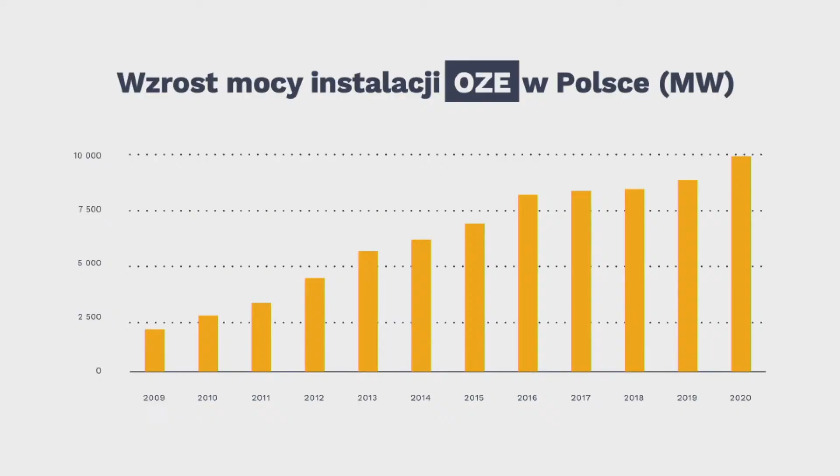LTE 450. Nowoczesna technologia, bezpieczeństwo, niezawodność, przyszłość.

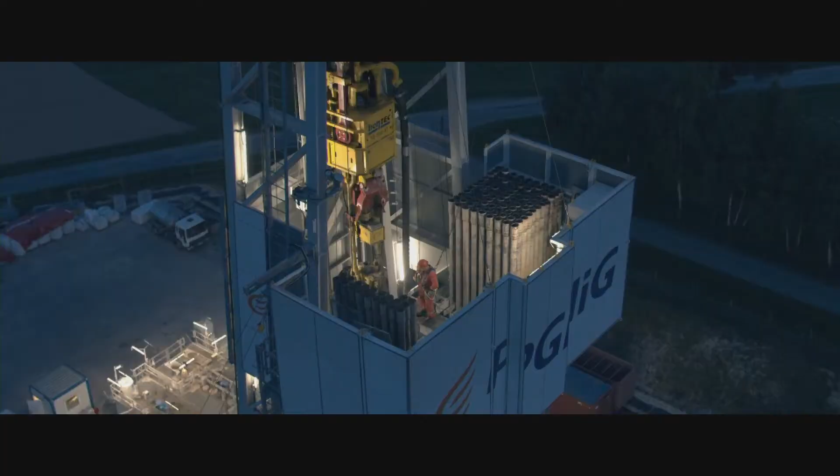Ma to kluczowe znaczenie dla ekspansji i przyszłości naszego przedsiębiorstwa. Jesteśmy wiarygodnym i pewnym dostawcą dla naszych partnerów biznesowych i klientów. Gwarantujemy stałość dostaw i najwyższą jakość produktów. Zapewnia to naszym kontrahentom poczucie bezpieczeństwa i warunki stabilnego rozwoju.

Strategia działania PGNiG opiera się przede wszystkim na poszukiwaniu i eksploatacji złóż znajdujących się na terenie kraju i za granicą. Dzięki temu Polska wzmacnia swoją niezależność energetyczną. Chcąc dywersyfikować źródła pozyskiwania surowców, importujemy gaz z rynków zagranicznych. Istotna część przyszłych dostaw będzie pochodzić z Ameryki Północnej.

Poszukujemy i eksploatujemy złoża ropy naftowej i gazu ziemnego na norweskim szelfie kontynentalnym, a także w Pakistanie i innych częściach świata. Całość tych działań sprawia, że jesteśmy kluczowym gwarantem bezpieczeństwa energetycznego Polski.

Gaz ziemny jest najlepszym rozwiązaniem dla każdego przedsiębiorstwa. Korzystając z zasobów naszej ziemi, troszczymy się jednocześnie o przyszłe pokolenia. Naszym celem jest ciągły rozwój i dostarczanie takich rozwiązań energetycznych. Dzięki temu jesteśmy dzisiaj obecni w każdym polskim domu.

PGNiG. Odkrywamy przyjazną energię.

Energia elektryczna towarzyszy nam w każdej chwili życia. Za stały i bezpieczny przesył energii elektrycznej w całej Polsce oraz bilansowanie krajowego systemu elektroenergetycznego odpowiadają pracownicy polskich sieci elektroenergetycznych. Energii elektrycznej nie da się przechowywać, dlatego w każdej chwili należy produkować jej dokładnie tyle, ile zostanie zużyte. Oszacowanie zapotrzebowania na energię elektryczną i jej bilansowanie to jedno z najtrudniejszych i najważniejszych wyzwań, z którymi polskie sieci elektroenergetyczne mierzą się każdego dnia. Nasza sieć to ponad 14 600 km linii 220 i 400 kV.

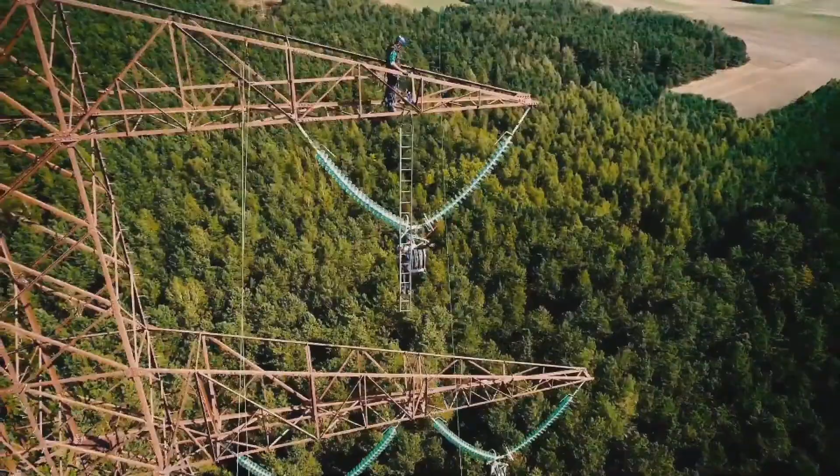Wraz z dynamicznym wzrostem zapotrzebowania na energię elektryczną musimy sprostać wyzwaniom nadchodzącym w kolejnych dziesięcioleciach. Przy wszystkich naszych inwestycjach minimalizujemy wpływ na środowisko naturalne i otoczenie. Wspieramy społeczności lokalne i naszych sąsiadów.

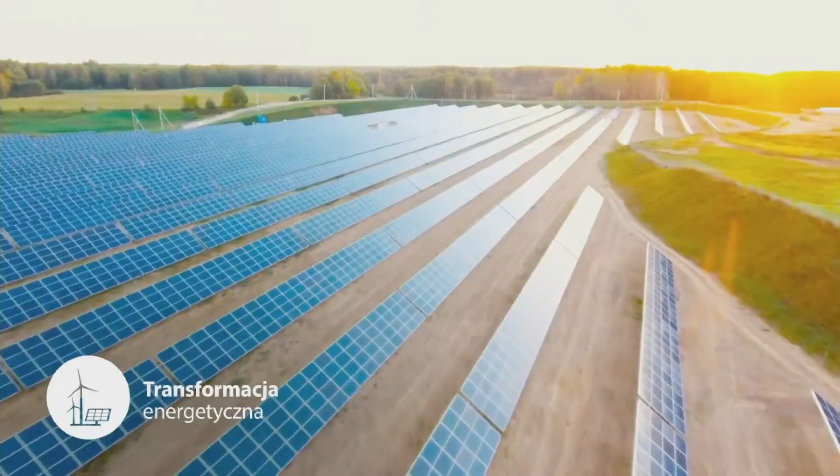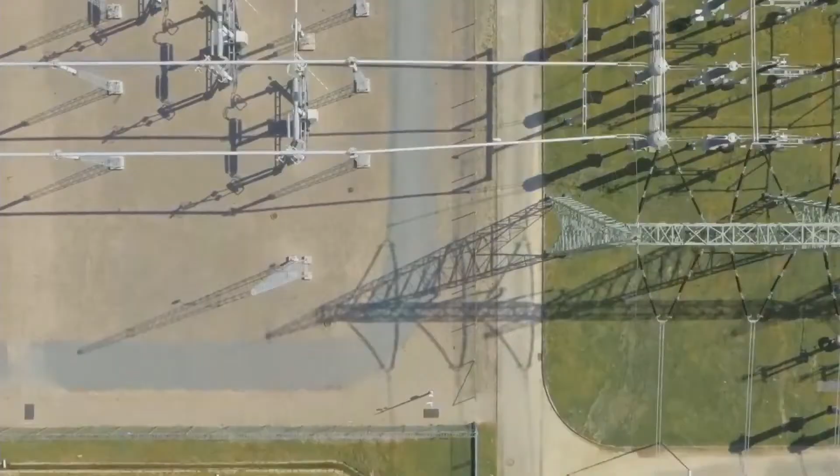No okej, dzięki, no spoko, jak się nie da, przeżyjemy godzinę.

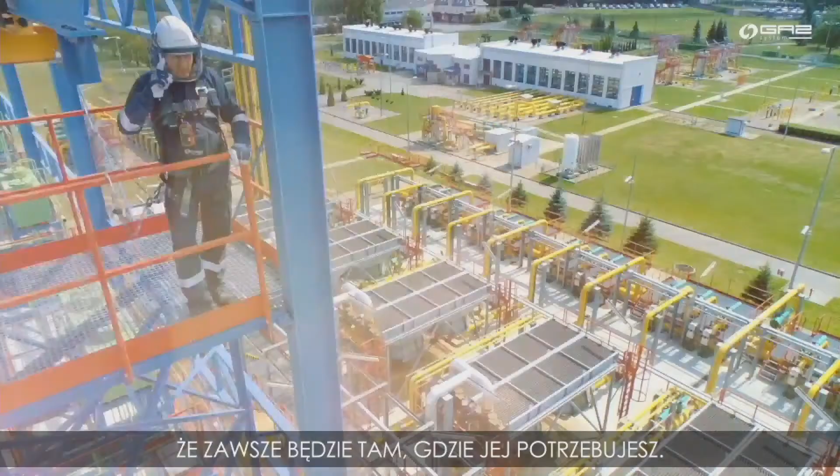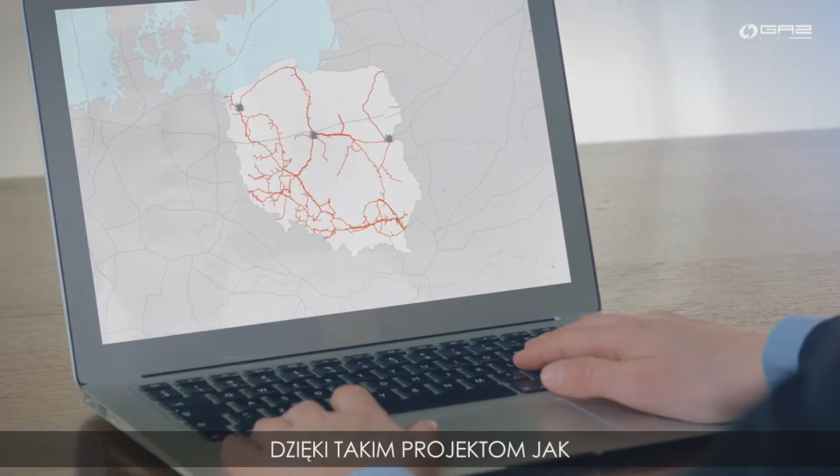Good luck. Thank you. Same to you. It's very nice. It's very good. Hello.

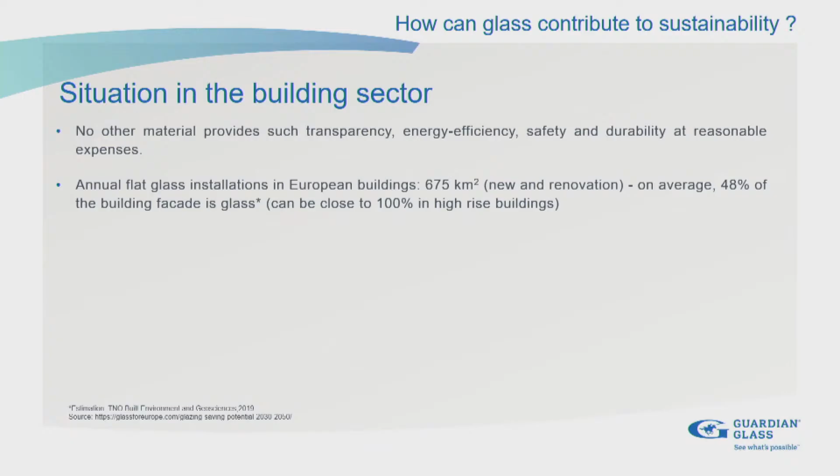If you look at annual flat glass installations in Europe, we have 675 square kilometers of enclosed area in new and renovation buildings. On average, almost 50% of the building facade is glass, but that can be even close to 100% if we talk about high-rise buildings with fully glazed facades.

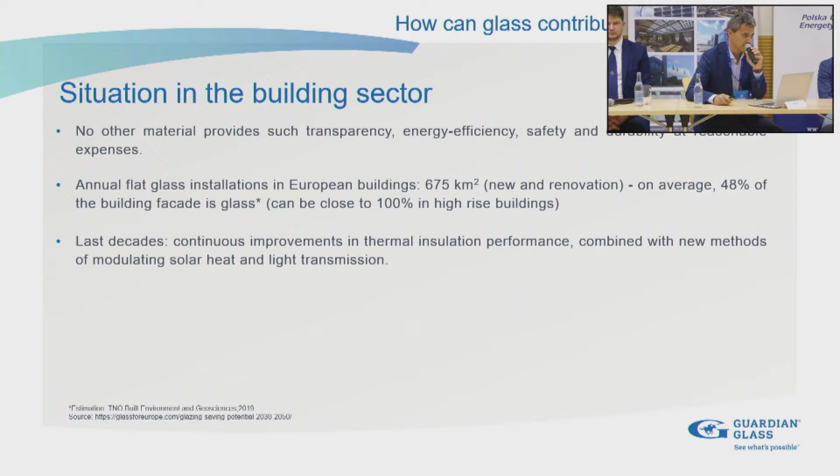In the last decades, continuous improvements took place in thermal insulation performance, combined with new methods for modulating solar heat and light transmission. I won't go too deep into that - these are the standard high performance glass products you all know, related mainly to solar control and thermal insulation.

You see that flat glass products are indispensable to key sectors of the economy - in building, automotive, and energy sectors. So in the climate neutral EU, and this is also an important message, by 2050 we will demand more glass for highly energy efficient windows, and not only windows, but also glazing and other cladding systems.

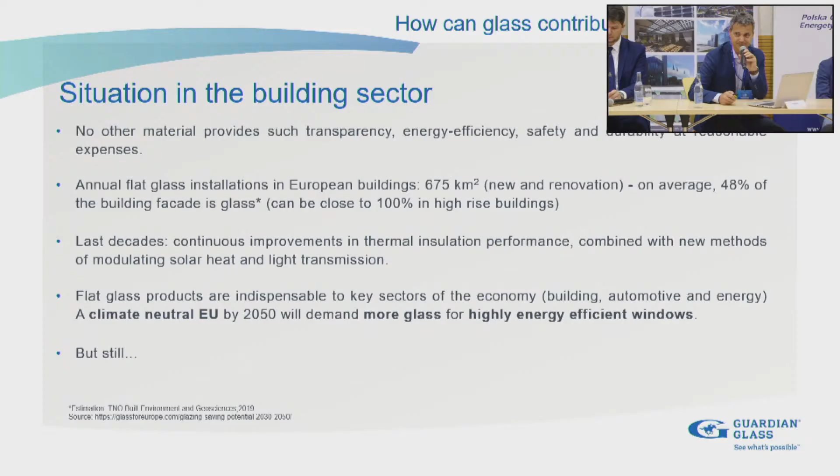But still, the building sector is the most CO2 emitting sector in the EU, with 36% of total emissions. This is a huge number, but the same sector has also a huge potential for energy savings.

For example, by energy efficient building products, ideally with a positive energy balance during lifetime. So if we talk about passive solar energy gain with a passive house or net zero energy standards, but also renewable energy generation - here we need to talk about heating systems.

Of course this needs to change from fossil fuels to electricity, heat pumps, but - and this is our main topic today - building integrated photovoltaic, because we need to use the surface we have available, or still create, to generate renewable energy in short and mid term, not long term. This is really a short and mid term issue.

But it's not only the products itself and the performance - it's also the approach to stewardship of the glass industry. What does that mean? How do we produce products? For example, in terms of material health, material reutilization, renewable energy and carbon management, water stewardship, even social fairness.

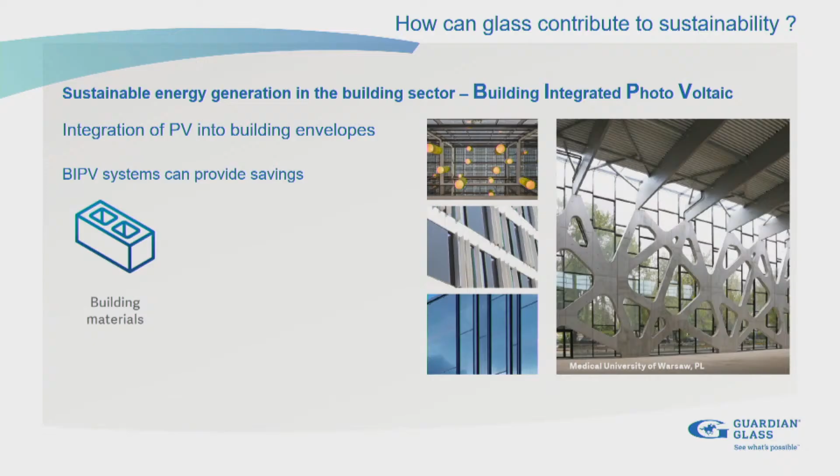And with BIPV, we can provide certain savings - savings on building materials, but also energy cost. So what is Guardian doing in terms of BIPV? We have a cooperation with ML System to offer a complete range, because we have recognized that these products, providing a sustainable way of producing renewable energy with glass in buildings, that's a key factor in the future. And that's really a big driver also for the European and finally also the global glass industry.

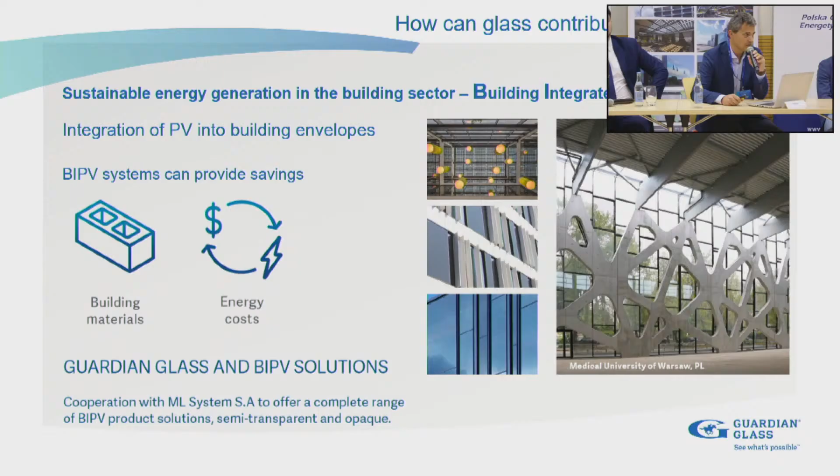So what means BIPV? Actually with BIPV we can cover all opaque parts of buildings. That can be just safety glass, printed glass, all possible shapes, finishes, for all kinds of design, but also transparent in double and triple glazing units, providing unaltered transparency and renewable energy at the same time.

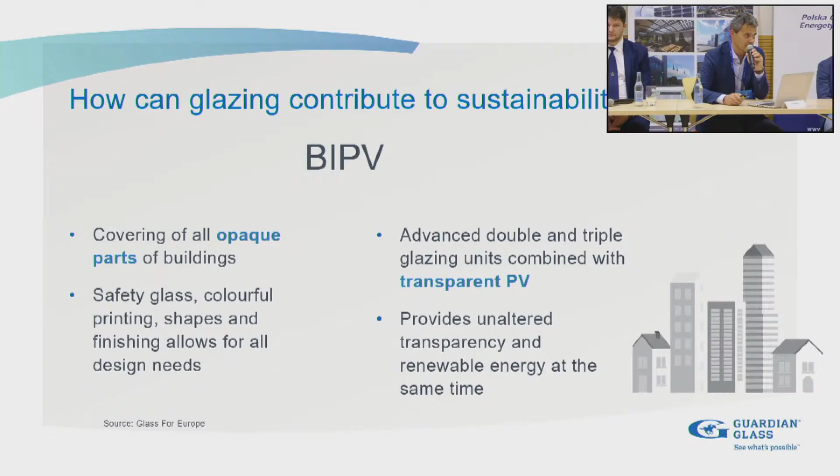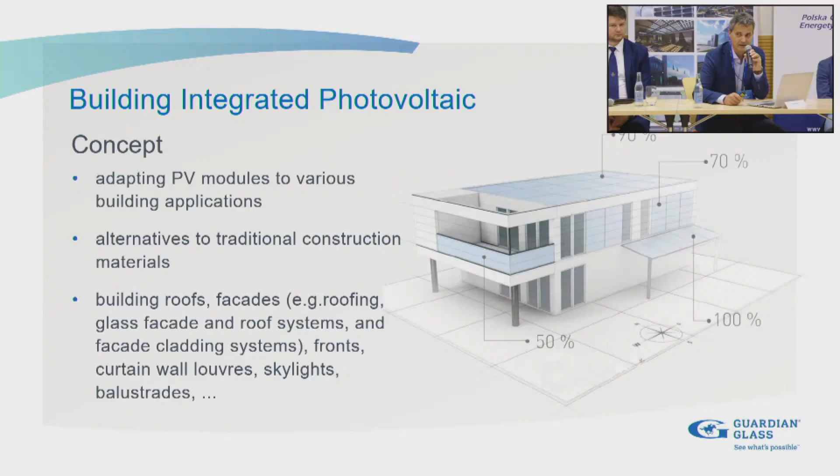So what is the concept behind BIPV? Adapting PV modules to various building applications and to replace other building materials, either glazing or other cladding materials like aluminium. In roofs or in facades, fronts, curtain wall louvres, skylights, balustrades. Wherever you install a piece of glass, theoretically you can install a piece of BIPV.

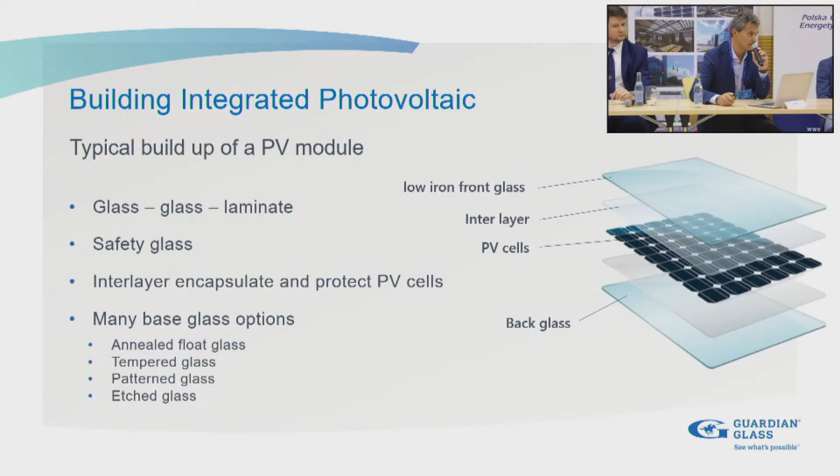If you look to a typical build-up of a PV module, you see we are very flexible. We can provide a lot of additional performances and attributes. We can use annealed float glass, tempered, patterned glass, etched glass to provide any possible design, and even safety features. So wherever a laminated glass is installed, we can think about installing building integrated photovoltaic.

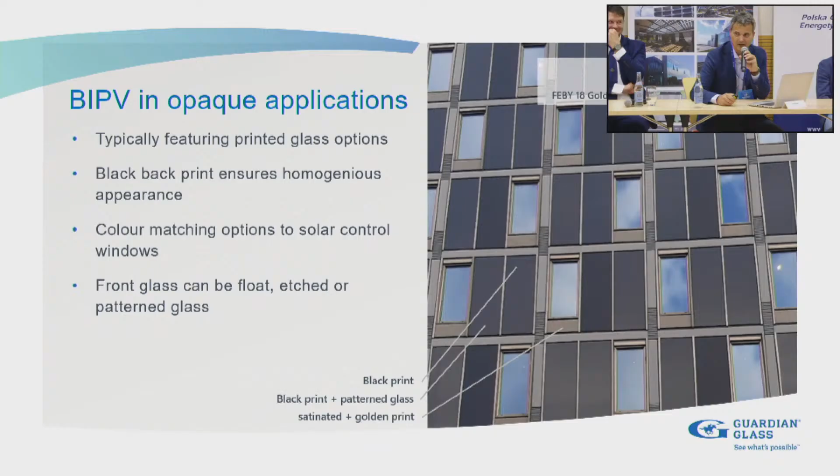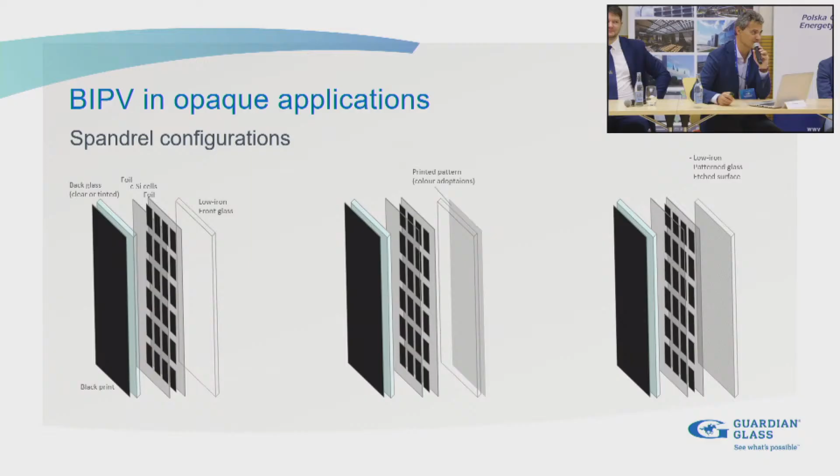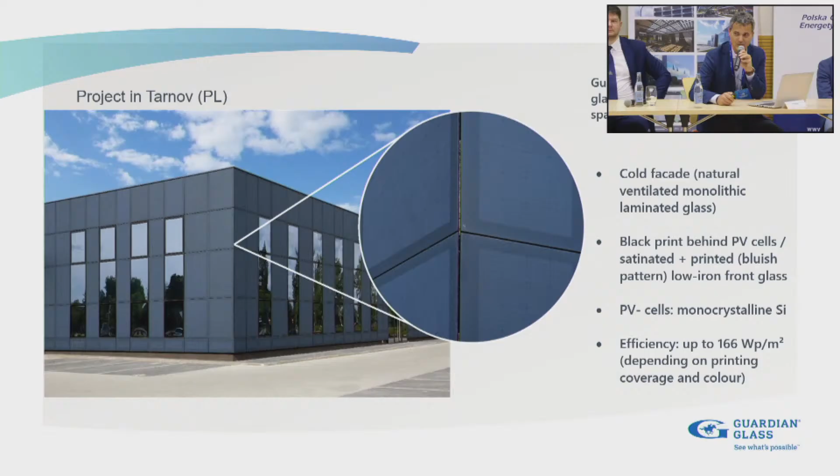So just a few examples. Here in opaque applications, this is typically combined with printed glass to even hide the silicon cells and to provide any possible look to match also to the vision, to the windows. And here you see the possible configurations. So the message is really flexible and we can really use it like a normal spandrel glass with all the design options we know for spandrels. Here even white look or bluish matching to the windows, to the solar control glass.

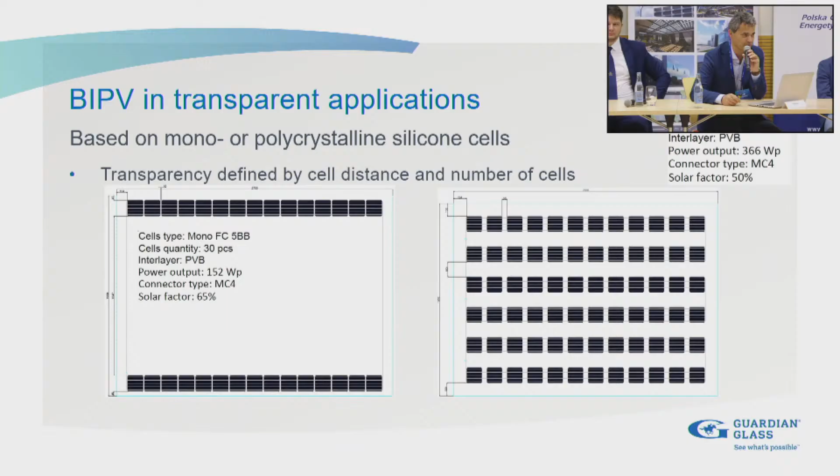But not only in spandrels, also in transparent applications. That's a simple IG unit with solar cells, and you can still look through. So the left you can even imagine can be a normal window. The right can be, for example, roof glazing. And even here, so many considerations, many configurations are possible, and it can even be combined with functional coatings.

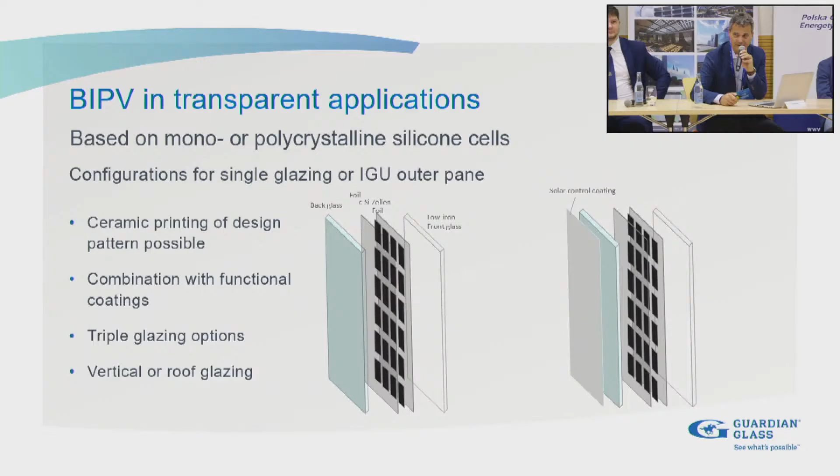Like here. And last but not least, I'm sure you heard a lot already about this new technology. And if we talk about transparent applications, we need to talk about this very exciting step: quantum dot. So generating electricity really on fully transparent glass. That's also a kind of laminated glass. And the very interesting thing is that with the quantum dot technology, we absorb parts of the solar energy, of the solar radiation.

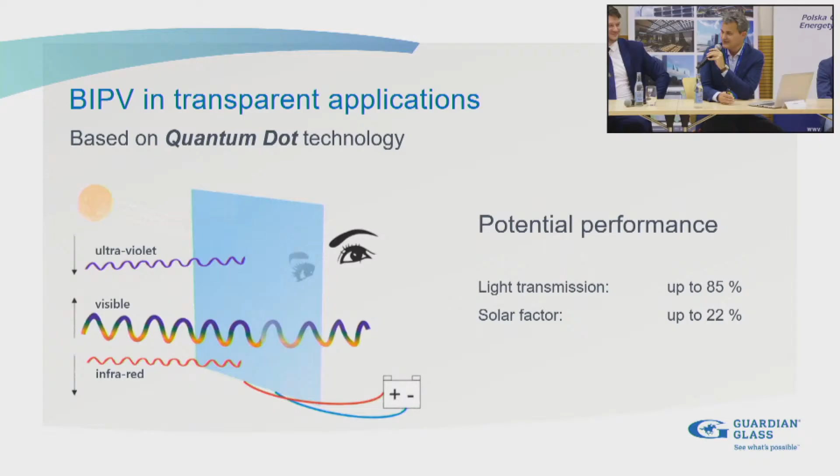But we can adjust which part we absorb. And this, maybe the performance you see on the screen, that's a little bit future music, but this is where we would like to be in a few years, very few years, to provide tailor-made performance with glass which can provide or generate electricity at the same time. So this is a little bit the future, but it's not only the future, it's a very near future, exactly. And this is how it will look actually. And for us, this is also the future of building integrated photovoltaic.

So let me conclude. The requirements of sustainable construction in the building sector are really strongly increasing, and political decisions are challenging the building sector. But these decisions also offer great opportunities for the entire glass industry and also glass processors, the entire chain in the building sector. Glass can contribute in many applications to sustainable building, as I said, efficiency, but also generating energy.

And building integrated PV is really a promising technology for generating renewable energy and reaching challenging targets in reducing greenhouse gas emissions. And last but not least, there is also one important fact that we need to take into consideration, not only today, actually always: considering the fact that 97% of today's buildings will still exist in 2050. So the careful selection of energy efficient and sustainable building materials today is critical. Actually not today, it was yesterday already, but today we always need to think about using the state-of-the-art technology and the most efficient products.

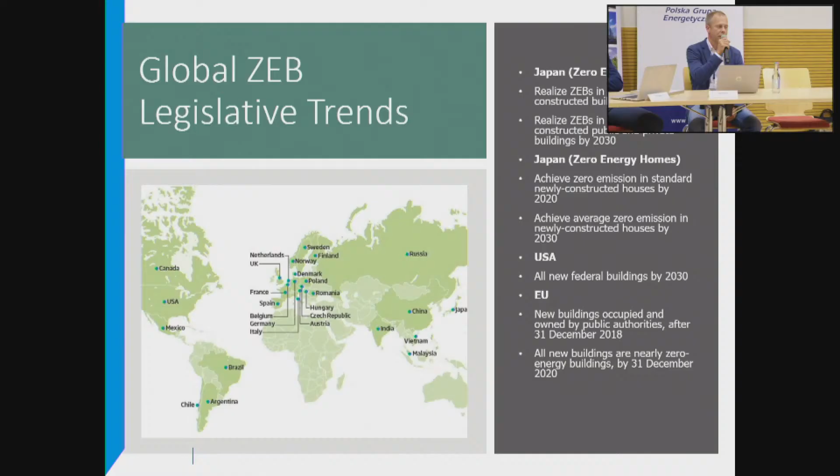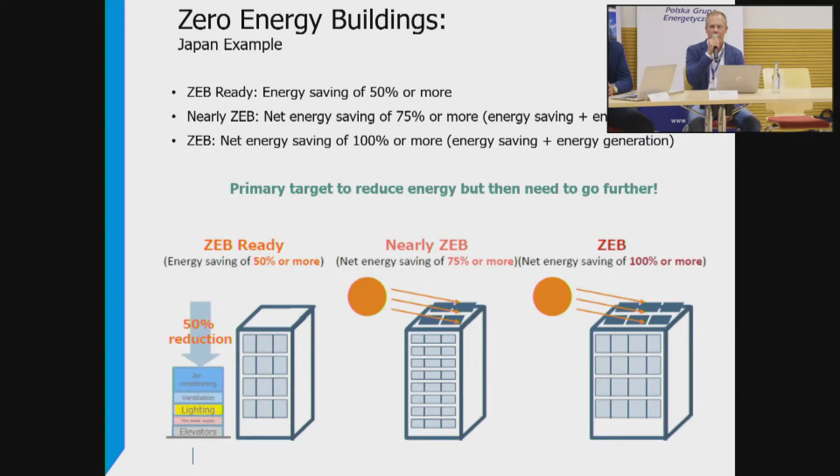Continuing with the Japan example: zero energy building ready - this is the first solution where energy saving is only 50% or more. This is ZEB ready. Nearly ZEB is 75% or more energy saving, and real ZEB is 100% energy saving or more. What does that mean? That the building has not only energy saving but also energy generation. So this is how Japan manages these zero energy buildings.

When you look at the options for how we can change a building to zero energy building or ZEB ready - for example, here we would like to reduce mainly air conditioning, which means heating, cooling, and all air conditioning. But what is the route for this reduction? First of all, high insulation of roof, walls, and of course windows and facades. We need low U value windows, and we need good G value solar energy transmittance. When we supply all of these values, then we can achieve zero or ZEB ready building.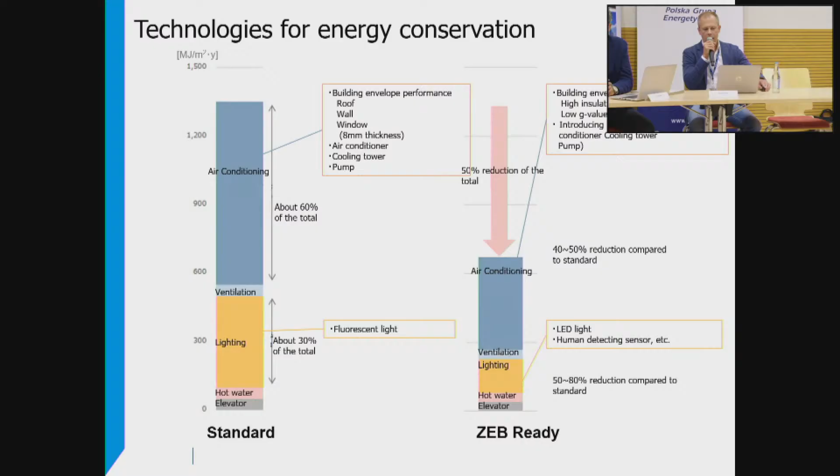NSG has looked at global ZEB calculations, not only in Japan, not only in the USA, but globally in many different cities around the world.

We can see what is necessary to achieve zero energy building standard. The most important is high efficiency IGU, insulated glass unit. Good IGU for the window, for the facade, is the most important thing. Maybe vacuum glazing would be an option in the future if costs would be reduced.

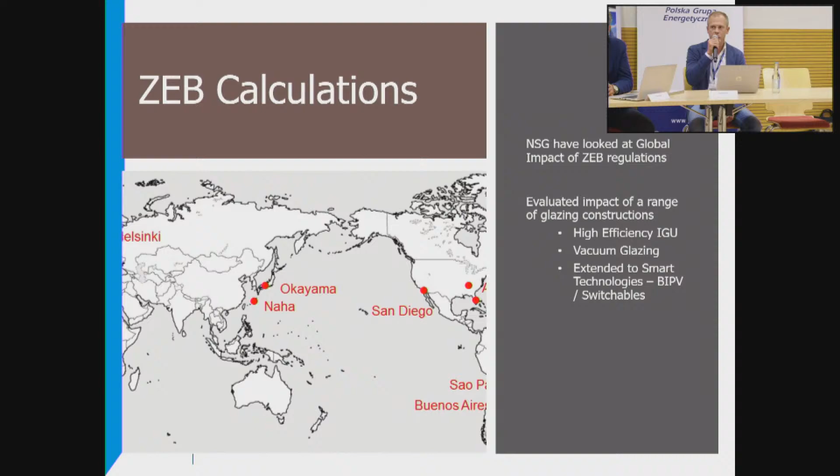Also, the extended building needs smart technologies like BIPV or switchable glazing. Key findings after these calculations: in some places we need very good U value, and in some places we need very good solar heat gain coefficient, or G value. That's the reason we need to offer the best products, best high performance glass for IGUs.

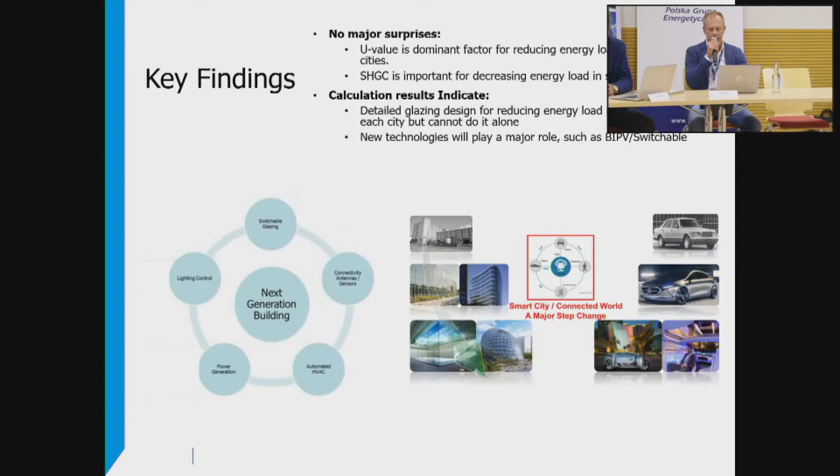What about the European Union? The European Union history of zero energy building, or near zero energy building, started in 2002. It was the first directive of energy performance, and this directive started with certificates for the buildings, for homes, for flats. It was a really big change in the energy performance policy, and also this directive had impact on renovation strategy.

Later, in 2010, was another directive, we can call it second directive, with NZEB definition, but the definition is not strict - each country can manage the definition independently. The second directive was also quite important because there was impact on renewable energy.

And the last one, the third directive from 2018, is focused on long-term renovation policy, but also buildings should be ready for the future, for electromobility and also for BIPV.

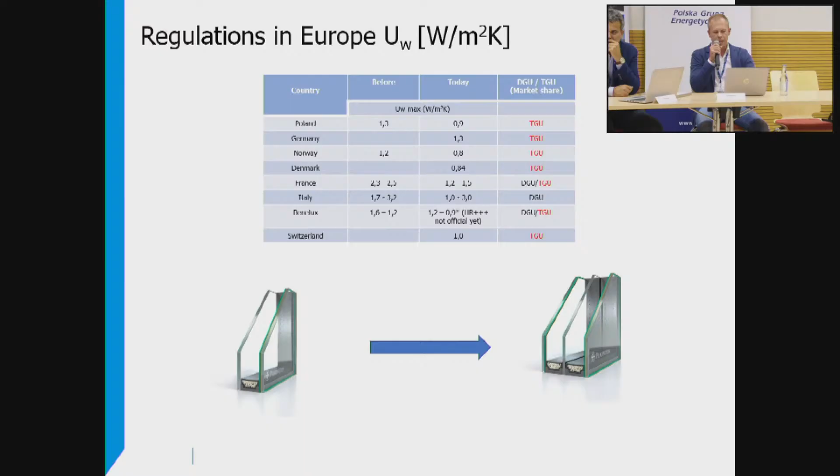Here you can see maximum U value, heat transfer coefficient for the window across Europe. You can observe that in Poland it's 0.9 - it's a really good level of the heat transfer coefficient, similar to the Scandinavian countries.

What else is possible? What changes are possible in the future? I heard that also in UK they are going to change, reduce the maximum U value, so it's also an option for the glass market in the future. As you can see in the south countries, in Portugal or in Spain, the values are very high.

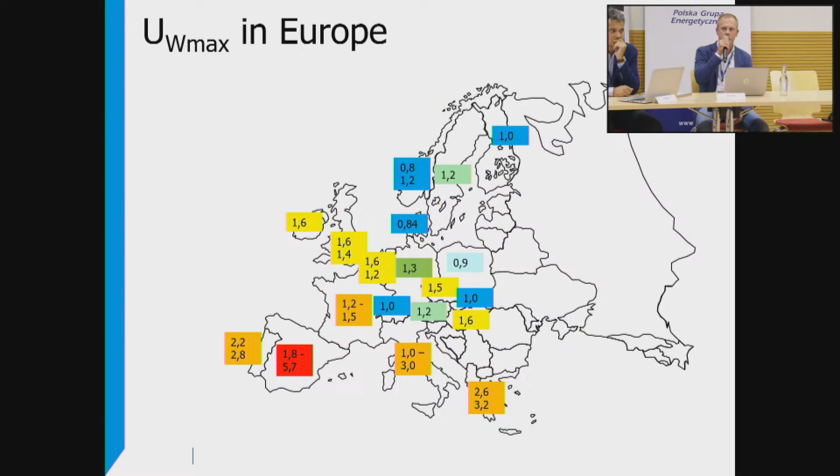But the real market is different - the real market is slower, and we have some customers. They export windows from Poland to Portugal, and the standard is for sure lower than 2 watt per square meter Kelvin.

Result, once again: Poland today is a triple glazing country, and the standard in the window is 0.5 or 0.6 watt per square meter Kelvin, with 2 times low coating, low emissivity coating, in the triple glazing unit.

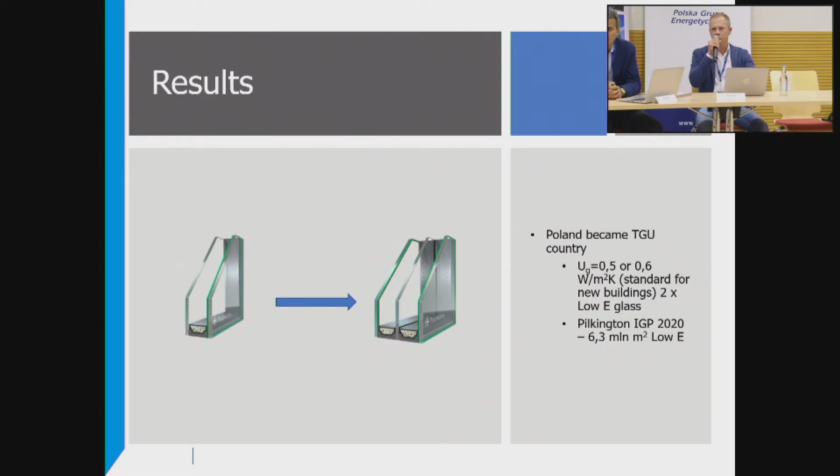As you can see, Pilkington IGP is a glass processor. In 2020, they bought more than 6 million square meters of low coating glass, and it's increasing every year - every year is more. So this is the future: low coating glass will be more and more popular in triple glazing configuration.

But also sun protection glass is going to be more and more popular. In the Polish regulation, we have the maximum G value of 0.35, so it means we have to consider using sun protection glass on the facade or also in windows. The consumption of sun protection glass is increasing every year.

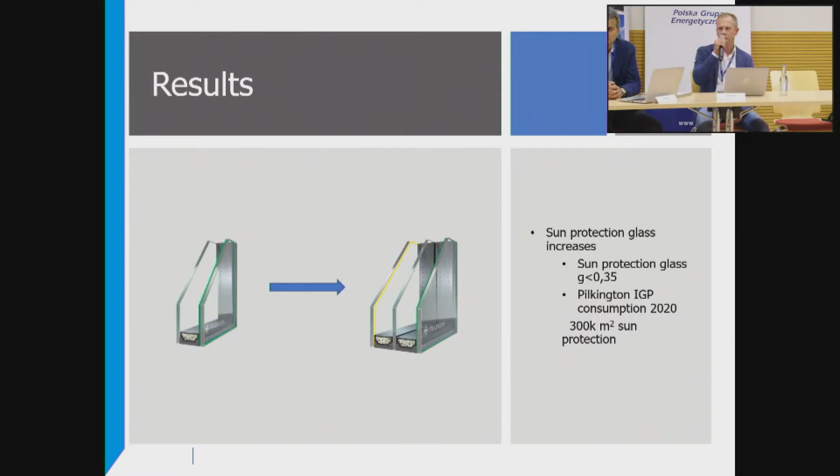Last year, Pilkington IGP sold 300,000 square meters of sun protection glass. As I said, sun protection is not only for big apartments, offices, or public houses - not today. Also standard blocks of flats, we can find SunCool, a sun protection glass, also in blocks of flats to reduce air conditioning costs.

For the photovoltaics, what options do we have in regulations? In Poland, the very important thing is the EP index, which has a maximum level according to building regulations of 70 kilowatt hours per square meter per year.

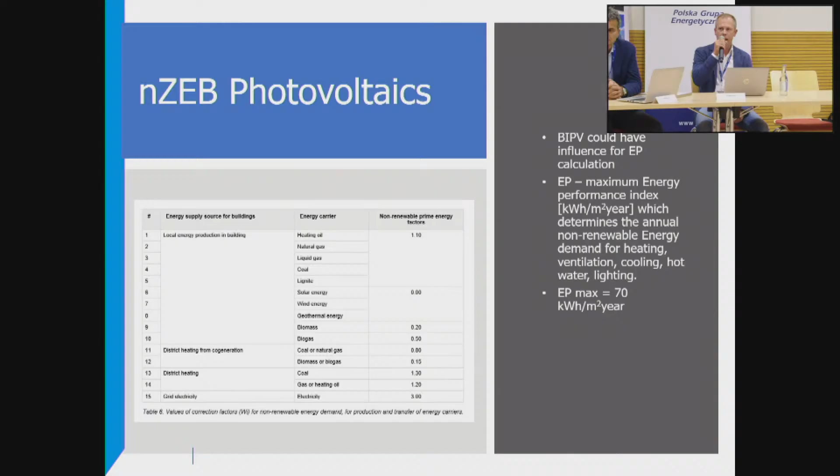This is a really big challenge to achieve this value for the house, and without renewable energy it could be impossible. The best option to achieve this maximum value is to use, for example, a heat pump together with photovoltaics on the roof.

So this is a big chance for photovoltaics in the future, according to these regulations. What products do we have for photovoltaics and BIPV? It's a special type of glass, Pilkington OptiWhite, which is a low iron glass. When we have low iron content in the glass it is much clearer, more transparent, and we can achieve higher light transmittance, which is very important for photovoltaic module efficiency.

Micro-white is also a special low iron glass, but ultra thin, with a thickness around 1 millimeter. NSG TEC is a special coating, using chemical vapor deposition technology. This is a transparent conductive oxide, which could also be very helpful in some kinds of photovoltaic modules.

In a referencing project together with ML System, we supplied Pilkington OptiWhite here in Rzeszów. Here is the University in Krakow, where Pilkington OptiWhite was also used in photovoltaic modules.

Here is a combined facade where you can see sun protection glass and also photovoltaic modules in the non-transparent parts. OptiWhite was used here for the modules as well.

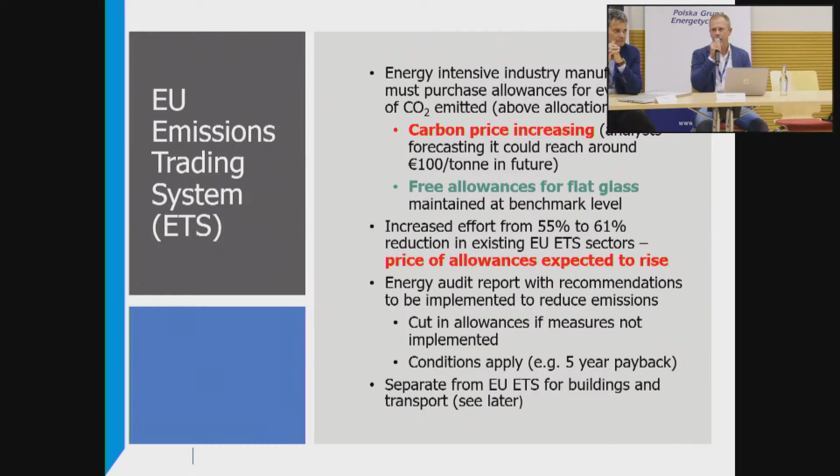When you look at the red sentence - the carbon price is increasing and the price of allowances is expected to rise. So anyway, this is the disadvantage of this system. The carbon border adjustment mechanism is good for stopping imports of goods from countries other than the European Union, but flat glass is not included, which means flat glass would still be possible to import without any carbon border adjustment. So we will see what will be the end of this legislation.

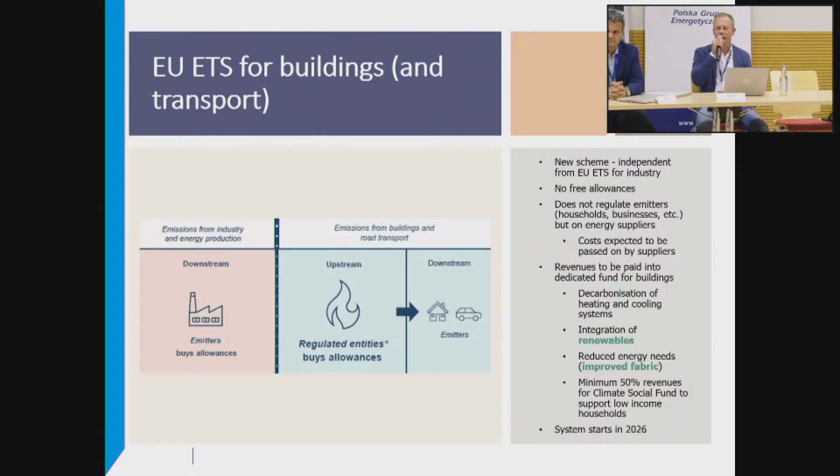And this is new, as I said - a separate emission trading system directly for buildings and transport. This is not clear yet how it will work. Theoretically, the cost should be rather on the side of suppliers, not the end customers, but we will see if that's possible.

Important will also be the energy efficiency directive. This is a 9% binding target of energy efficiency by 2030, if the baseline is 2020, and an obligation to renovate 3% of floor area a year of public buildings. So this is a really big challenge for investment.

What is most important when we look at BIPV? Its new renewable energy target for 2030 is 40%, and this is a big challenge and big opportunity for BIPV and photovoltaics.

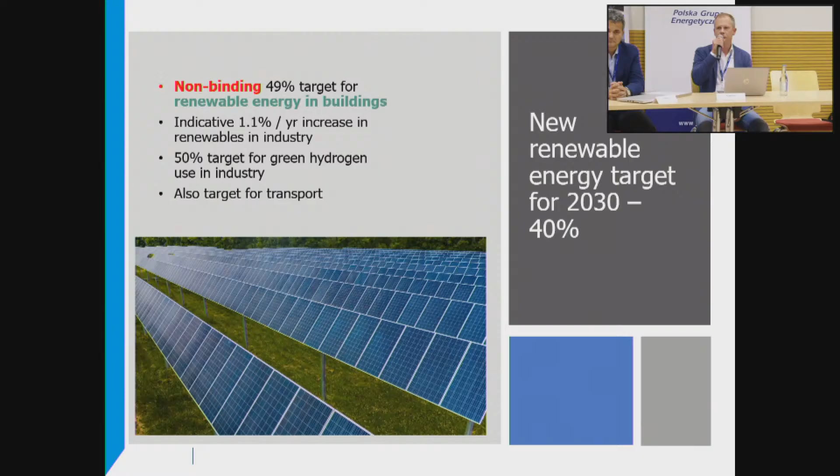So it's a lot of money, and this fund will be available as a loan or as a grant, and this could have a big impact on the building and construction industry, and also for photovoltaics. The Glass for Europe organization is lobbying for this, and November this year will be the critical month, and we will see what the last version of this legal act will be.

So anyway, when we invest all this money in the market, in the industry for renovations, for new zero energy buildings or near zero energy buildings, we will for sure have many years of increase in the building sector and also in photovoltaics and BIPV sector. So that's all, thank you very much.

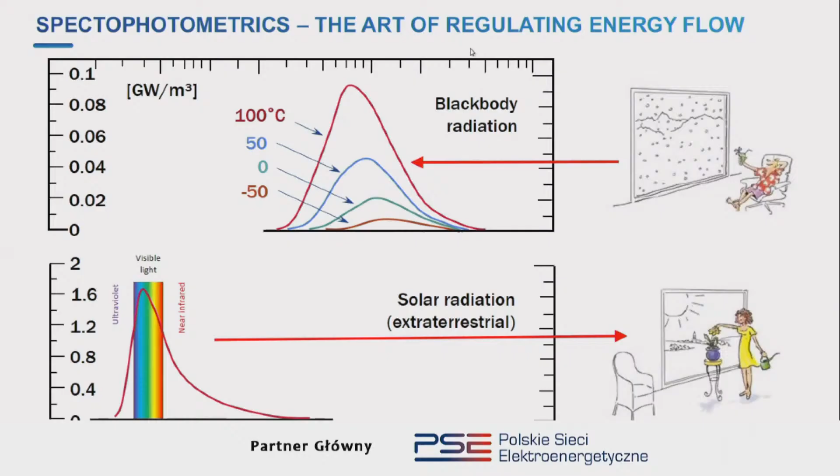So looking at that, we somehow managed to tailor our coatings so that they can meet the different demands. If we look at the low energy glass on top, the red curve here, we can see that the wavelengths being let through the window are all the wavelengths coming from the sun.

And then it stops at around where energy starts wanting to escape from the house, so that we can get a low U value, but we get a very high G value, it's called, the amount of energy that comes in. And then in recent years, we've been able to develop more and more precise solar control glass that selects what wavelengths to come into the room.

So if we look at the most modern glasses, there is no infrared light directly transmitted. All the energy that enters the room comes in the form of visible light. And there is a glass type called the 70/33 that I use a lot, because of the glass types that block out the infrared, this is the one that lets through the most visible light.

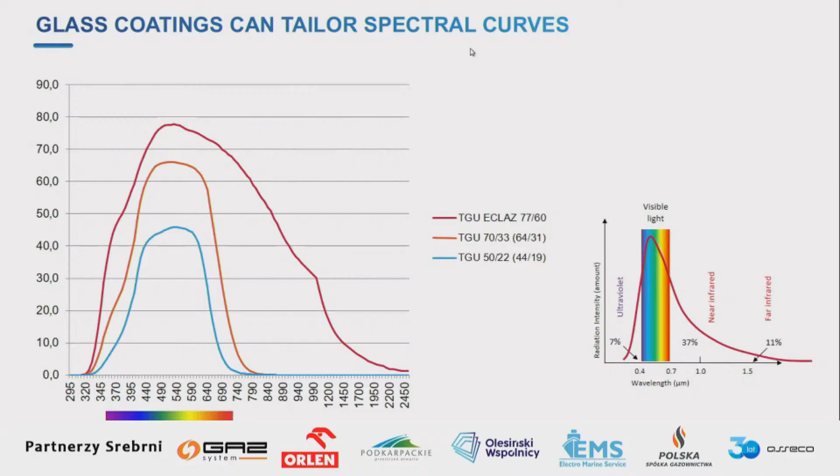So going to stronger and darker solar control glass means only to decrease the daylight. And with the tight energy rules today in Sweden, the windows are getting smaller and smaller. So we really cannot allow ourselves to waste any daylight on solar control. So we have to find more dynamic solutions instead. So what we're doing is that we're actually cutting out the infrared light and selecting the visible light to go through the windows.

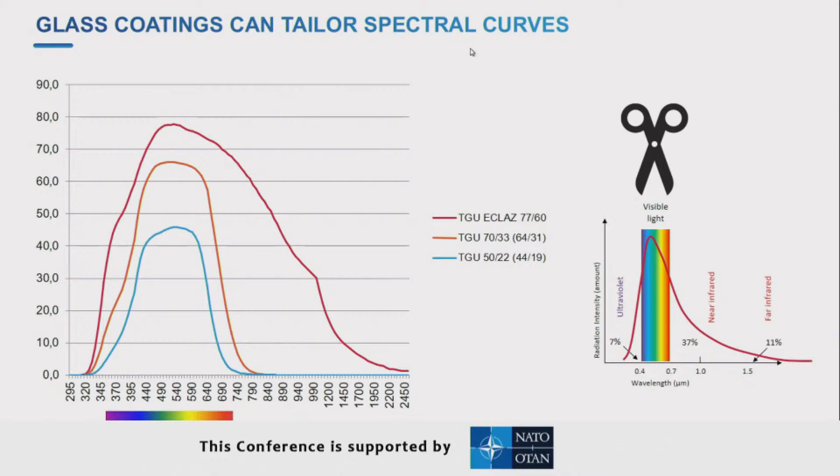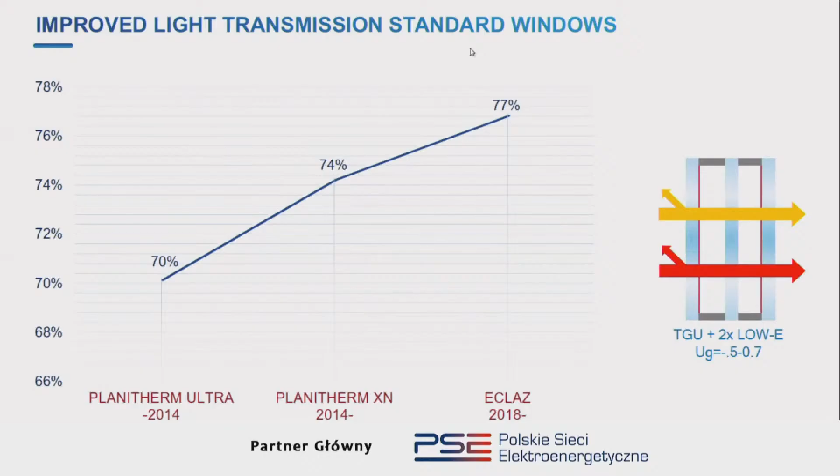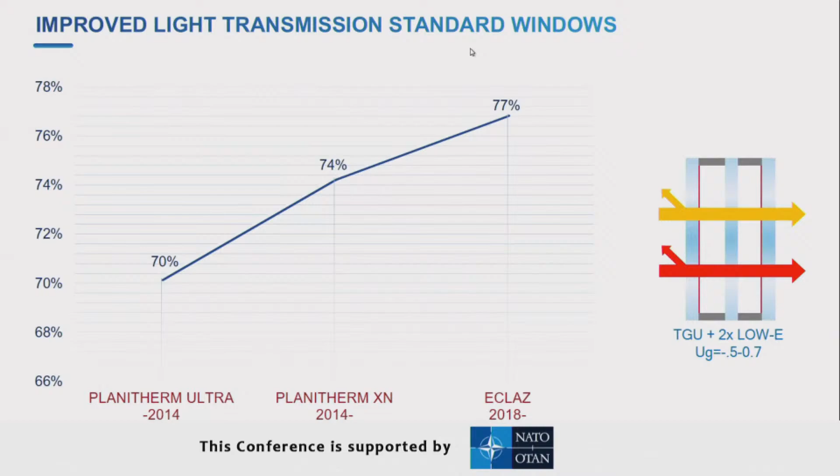The designed spectral curves have led to increased light transmission in standard windows. The low E coatings have improved, so I get like 7 percentage points more light now than I did 7 years ago through the window. If we would continue that way for 30 years, we would have 107% light transmission, which would be really cool. This is for triple glass windows, that is what we use in Poland and Sweden today as a standard.

And that is a big change. And these things have led to a lower operational footprint of buildings.

And then also to add energy, to get to plus energy, we can use building integrated photovoltaics. I guess you've talked quite a lot about that today. My problem with BIPVs have been that they look dull, they look boring and black, and they look like black holes in the building. So I'm happy to say that we don't need to decorate the panels anymore with screen prints and colors that reduce energy.

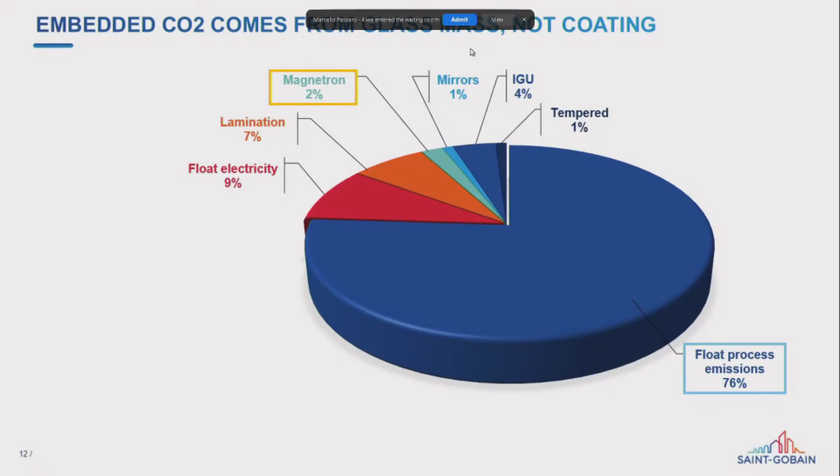Well, one thing is that we have increased demands for acoustic comfort. And acoustic comfort means that we actually add weight to the glass, mainly to have less noise coming through the glass. And that can double the weight of a window easily.

And then also we have the window sizes. We have to think about what the sizes are of the raw materials in order to save on the optimization. That is not a problem in standard windows, but for facades it really needs to be considered.

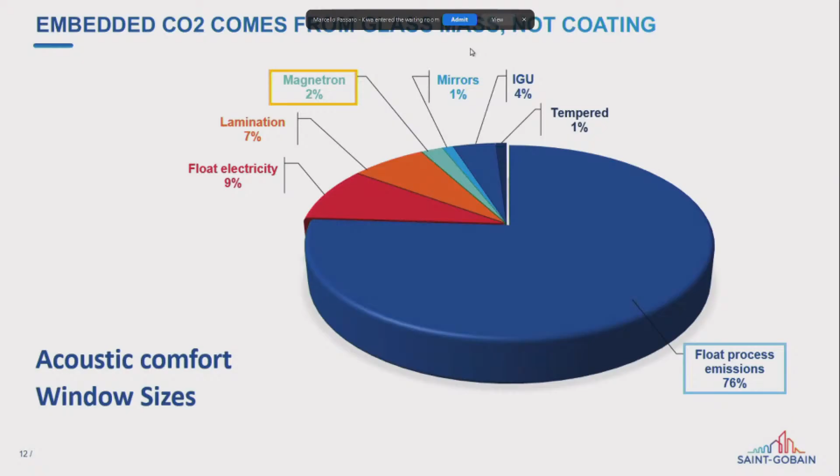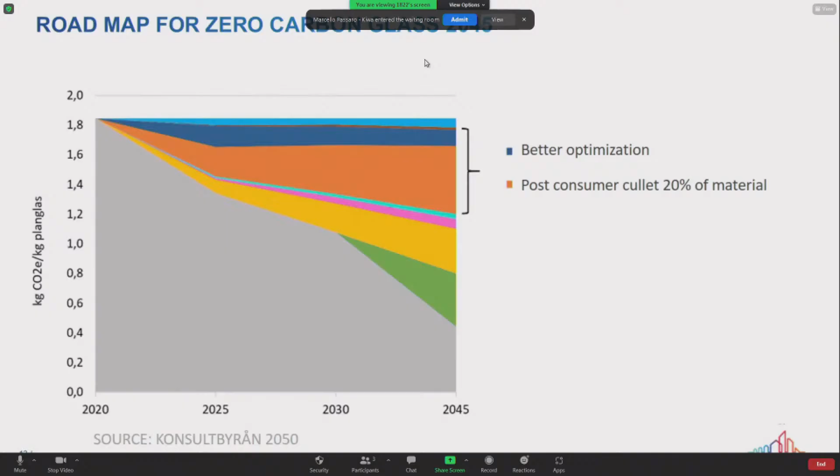So how do we get to carbon dioxide neutral glass, which is our target? We have to get there in Sweden by 2045, and we have this 2050 target. So if we look at this backcasting, it shows the importance of getting flat glass recycled, which is not done today. If we look at the top light blue segment, that's making transportation carbon neutral. The blue and orange segments are about better cutting optimization, better use of raw materials, and having at least 20% of the raw material being cullet, because that saves energy and raw materials.

That's actually the most important step, and it's the one we can help with by identifying buildings sent for renovation or destruction, and using that glass instead of putting it to landfill like we mostly do today. The pink and yellow fields are about getting green electricity for our floats, and then the green part is to use hydrogen instead of natural gas for the float process. Finally, the gray part is that the soda we use for this soda lime silicate glass is quite demanding in energy to produce, and it needs to be decarbonized. So we need to stop using fossil fuels in the whole process and recycle more glass.

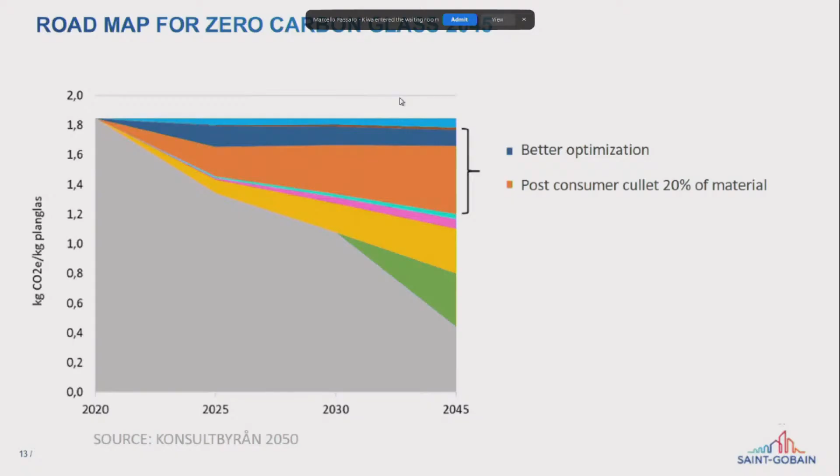So we've started in Sweden. It's a difficult task recycling glass, it has a lot of purity demands and stuff. But if we look at the biggest IKEA store in the world in Stockholm, we've replaced all the windows with a 7033 solar control glass, and recycled the old windows. The same is being done for the old SAS Airlines head office in Stockholm - to the right you see a picture where the solar control glass has replaced the old glass there.

In cooperation with the recycler, Sweden's second biggest recycler, Ragn-Sells, we are investing so that we will be able to take a lot of cullet, as it's called, from Sweden all the way to Poland or Germany, probably in the second quarter of next year, to show that we don't even need to be close to a float to be able to recycle. The only thing we need to start thinking about, except finding a recycler and a partner, is not to break the glass.

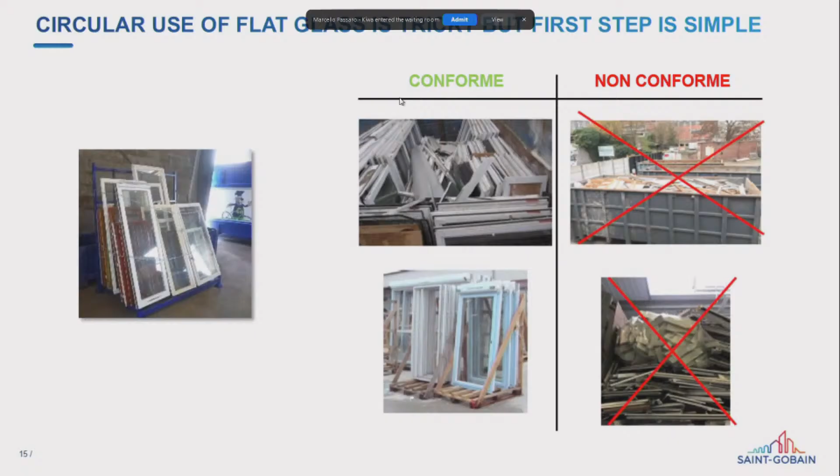Today, if we remove a window, we're very careful until we're somewhere we can safely drop it into a container and be satisfied to hear it break. But if we instead store it standing up and hold it on pallets that can be transported, that's the starting point. From then on, it's just like a designed route on how to recycle it.

So the focus is starting to shift from the operational footprint in Sweden to the embodied carbon, and that is something that we really need to focus on from now on.

So if we look at the next thing, the need for building simulation to reach low energy levels in the building - if we look at Sweden, we can see that the demands are getting stricter and stricter for the buildings. First of all, we cannot, like we did in the 1980s, stop using windows. The building norm tells us we need good access to daylight, and there are limits in the daylight factor that are becoming legislation and not advice. On top of that, we have ever stricter demands on energy consumption.

I've talked about the U value before. I don't have time to explain what it is, but today for the whole building enclosure, you need a U value average of 0.5 in Sweden. It's easy to get low U values in the roof and in the basement, but on the facade it's difficult. So the taller the building, the more difficult it is to reach these demands.

Also in Sweden, since 2002, the solution we choose to meet the energy legislation needs to be proven in a building simulation software. So I'm cooperating a lot with building simulation software, IDA ICE and ESPO, which dominate in Sweden these days, because they say that if you go by generic solutions, you won't find the correct solution.

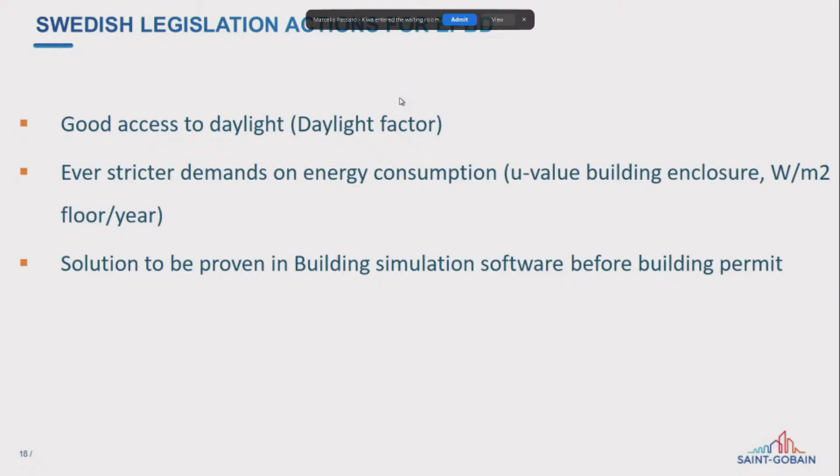I also forgot to mention that starting from next year, we need to declare the carbon footprint of the buildings that we finalize. And from 2023, there might be demands on how much solar heat can come in through a window divided by the floor surface, so that the smaller the room, the less energy can enter.

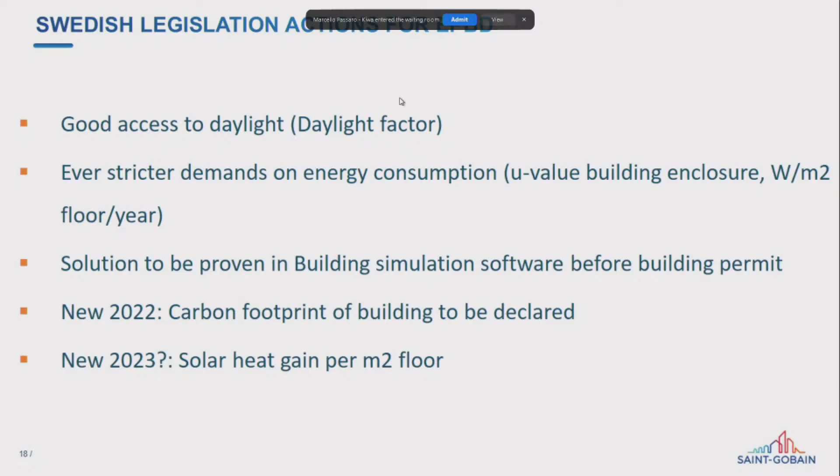And all this together means that we need to use dynamic solutions. We need to have glass plus some sort of a shader, so that when the daylight is there, we just harvest it, and then when the sun is there on the facade, we need to stop it.

And doing building simulations early is really the right way to do it. That's what I'm on tour with now.

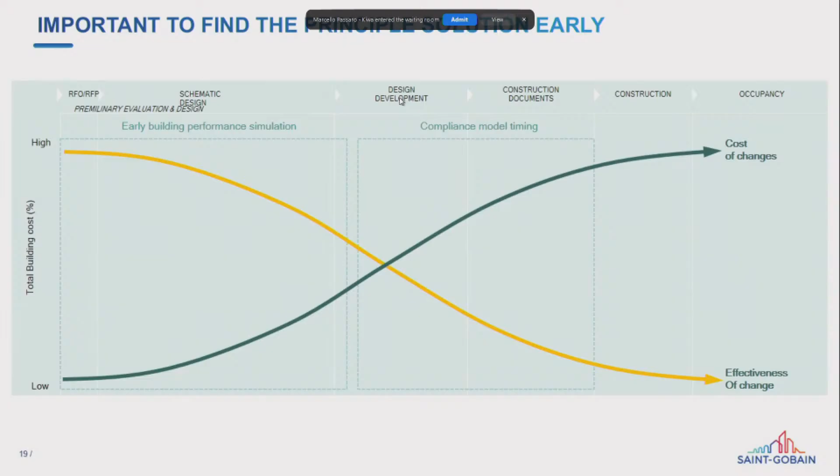So we really need to start pushing that to early stages, and together with the software developer Equa, we're making templates so that architects and entrepreneurs will be able to make quite simple simulations in early stages with advanced products and tools. It's called the Early Stage Building Optimization, ESBO, and the method is to use a simple box model developed in the United States.

You have a repetitive facade and you take one piece of it, or a few pieces depending on the angle to the sun, and analyze them really carefully, and then you can get a result that you can use for the entire building.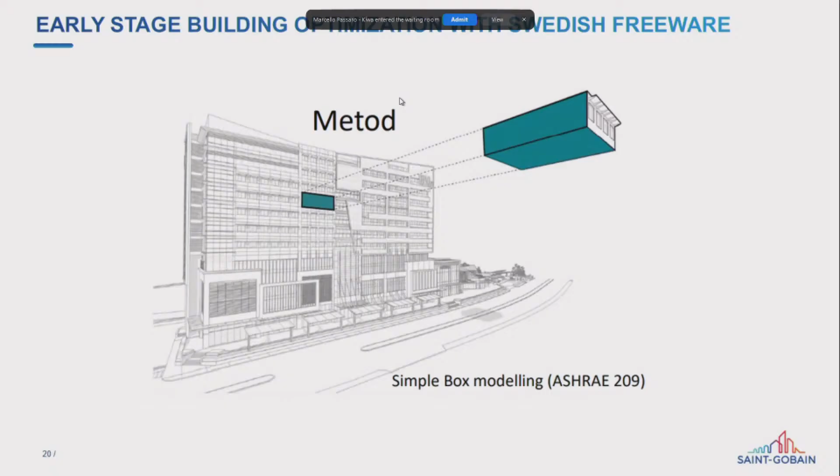So we need to see if we can optimize to solutions that have low carbon footprints.

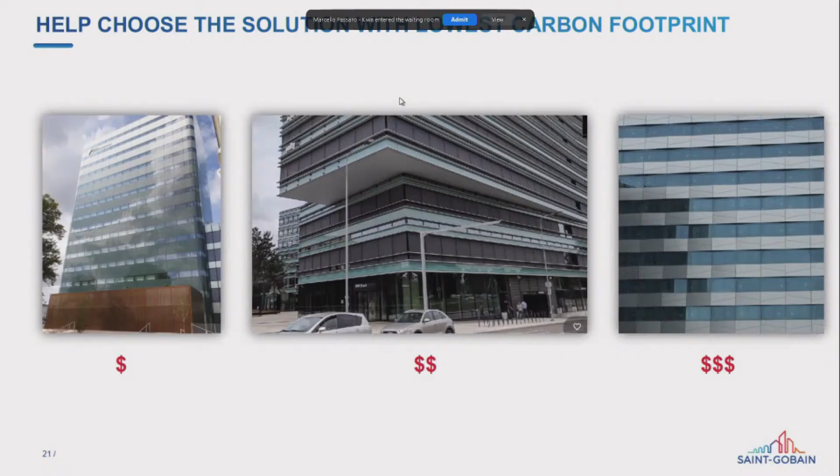This has been a tricky journey for me to get here, and it's been a tricky lecture for you to listen to, but I assure you, if you study the 75 pages that I've written in this booklet, you will be a lot wiser. Those are all my personal opinions and experiences from 20 years in the business, so I find it worth reading.